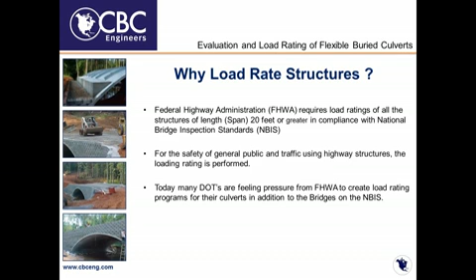Most of the structures that are load rated today in a conventional sense are conventional bridges. Those generally have spans of 20 feet or more, as mandated by FHWA. Here in Ohio we go down to 10-foot span as bridges. Today, more and more DOTs, states, and municipalities are being pressured and mandated by FHWA to look at smaller diameter structures and load rate those as well. That's what we'll be speaking about today.

Just some general information about loading on flexible buried structures. Generally, there are two categories: ring compression structures that develop their load carrying capability by carrying thrust tangent to the pipe wall, and flexural-based structures, such as aluminum box culverts, that depend on the moment capacity of the plate to carry the load. For ring compression structures, which we'll focus on today, it's a pretty simple calculation of the ring compression or thrust load in the pipe wall, based on the pressure at the crown of the structure and the span of the structure.

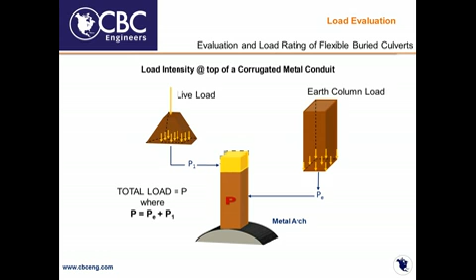That pressure at the crown of the structure generally is comprised of two components. One is your permanent earth loads or dead loads — this could also be pavement loads or concrete slab loads if you have a load relief slab of some kind over the arch. The second component is the temporary live load over the structure. This can be vehicles, tractor trailers, railroad, or even airplanes.

Flexible buried structures are inherently part of a soil structure interaction system, meaning their stability partially depends on the stiffness of the backfill material and the in situ embankment fill around the structure. If a structure is seen to have excessive shape change, a likely culprit is insufficient backfill support.

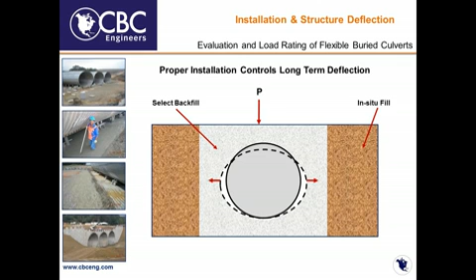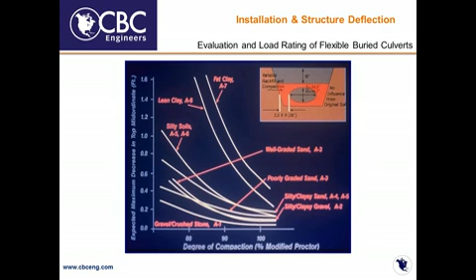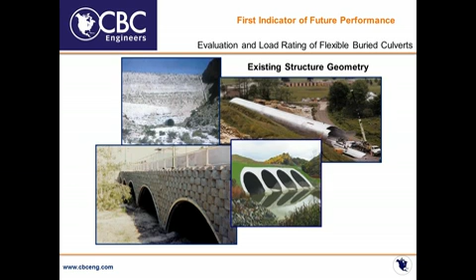As we spoke about relative to doing load ratings, you must know the existing structure geometry to be able to load rate a buried flexible structure. The Ohio DOT and other state agencies have developed relatively in-depth procedures for doing field evaluations of in situ flexible structures. Part of this is to determine the shape of the structure, as well as to assess its overall condition, which could contribute to varied capacities in the load rating calculations.

Flexible buried structures are designed to deflect, designed to change shape. As a flexible structure deflects under earth load, a soil arching is created that inherently increases the overall load carrying capacity of the entire system.

As we spoke about, if the backfill support is insufficient, there is the possibility of excessive shape change that could result in lowered capacity and/or higher loading on that structure. That needs to be considered in a load rating.

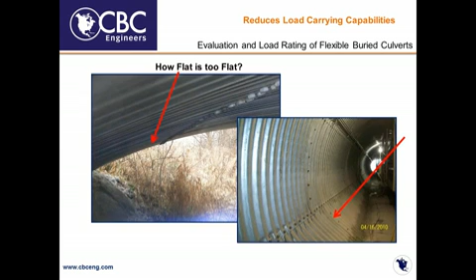Another possible cause of shape change in a structure is excessive live load with insufficient cover. A lot of times this happens during construction, where there is insufficient cover over a structure. A large piece of construction equipment is run over it, and you see a localized deflection where that concentrated loading was applied, signifying that the overall flexural capacity of that structure in its top arc has been exceeded.

The load rating of a flexible structure needs to be based on the critical shape geometry in any area that could be traversed by live loads.

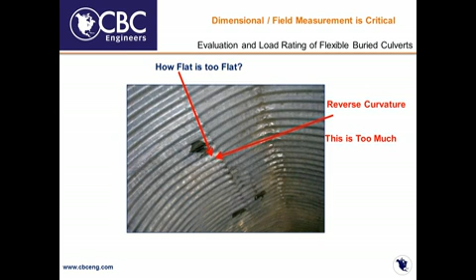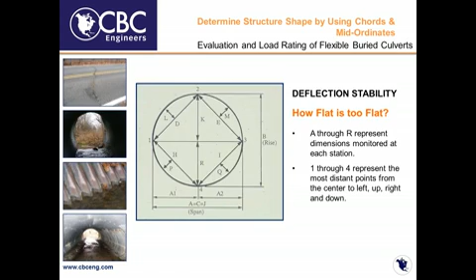Those measurements, where physically possible, can be manually measured using 4-foot levels, measuring rods, architect's rule, or engineer's rule. In a lot of cases, especially with larger diameter structures or difficult site conditions, you need to be a little more innovative about how to get those measurements.

We as a consultant try to be creative in that. We've developed and patented some rudimentary procedures to do that. This one on your screen is simple but effective. It consists of a handheld laser measuring device mounted to a tripod with a rotating wheel that can be rotated at an even degree increment radially.

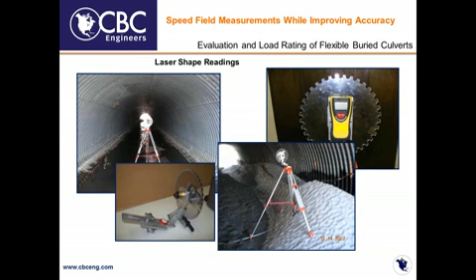At each degree increment, you're able to make a laser measurement out to the interior wall of a pipe, basically making the spokes of a wheel that measure out to the pipe wall around a full 360 degrees. Based on those measurements, that data can be plugged into CAD software, and you can get a relatively accurate, relatively exact representation of the interior geometry of a structure at whatever station you want to measure it at.

From there, that information can be used to physically measure those chords and mid-ordinates within the CAD software, or you can measure the radii of certain arcs. You can also, if the decision is made that some kind of remedial measures for a structure are needed, you've already got plots available that would show the size of a reline pipe that could fit, or if there's going to be stiffeners of some type added, you've got the geometry of the structure ready to use.

Another relatively simple but very effective piece of software is called MULTSPAN. It is essentially a geometry comparison model. It allows a direct input of measured chord and mid-ordinate values for a certain pipe at certain stations, and you're able to compare those measured values with theoretical values for that shape, or put in measurements from successive sets of measurements and determine a rate of deflection, or if there is any continued deflection in a structure over time.

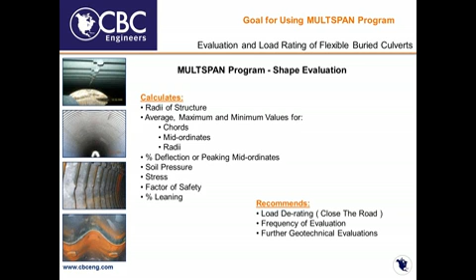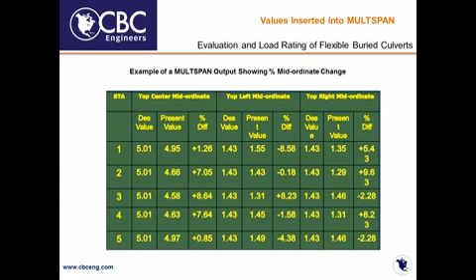This is an example table of some of the mid-ordinate output from MULTSPAN. Not a complex thing, but it's very effective to show you where you're seeing deflection and not. You'll see that it generally concentrates on the top center, top left, top right mid-ordinates. The top arc of a structure is generally its main load-carrying component, so that's what's focused on.

Here's the general guidance recommendations from MULTSPAN. As the level of mid-ordinate change or shortening occurs, along with the depth of cover you're looking at, the guidance recommendation becomes more severe. Once you reach that 25 to 30% mid-ordinate change, based on field evaluation of in-place structures, you've reached a level of deflection where the structure may no longer be acting like a ring compression structure. The radius may be so flat that it's starting to act like a flexure or beam type structure.

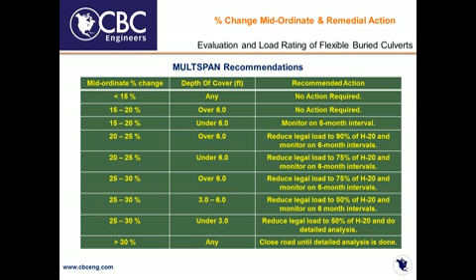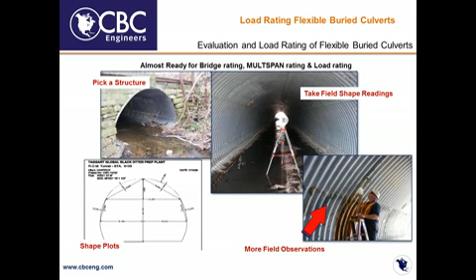So once you've made the measurements of the structure and got the plots done, a little more data is needed to actually do the load rating, some more field observations. Some of these specific to flexible buried structures are what you see here. Some will directly affect the load rating, such as features causing a loss in section, or deflections causing that top radius to increase, or features causing the load in the pipe wall to be increased. Others are monitored on a continuous basis to verify if any conditions are continuing to deteriorate, or if further, more in-depth evaluation than a simple visual inspection is necessary.

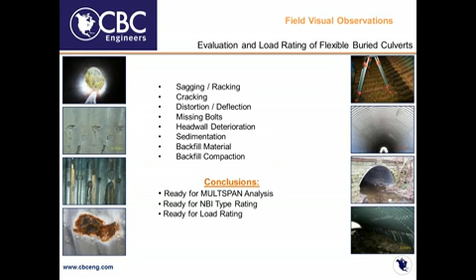Again, those are some of those same factors repeated, very specific to buried flexible structures. Once you've got this data along with the shape measurements, you're able to do the MULTSPAN analysis like we talked about. You're also able to do a conventional NBI type observation rating on a structure, as well as move on to the actual empirical load rating.

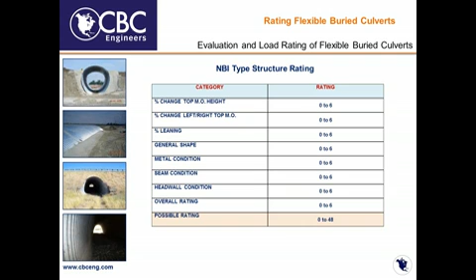Many of you may be familiar with the NBIS rating for conventional bridges. This is a system that was developed in conjunction with ODOT and FHWA by a former colleague of mine that is still used today for observation rating of flexible buried structures. It's got some categories specific to those types of structures, with 0 to 6 kind of rating categories.

This is a general comparison of that type of system with the conventional NBIS system. If you've got no category less than 3, or 3 or less, you're generally in that A, uniform deterioration type category. If you've got a single category with a score of 3 or less, you move over into the B type, more localized deterioration, which is similar to how the overall NBIS rating is determined.

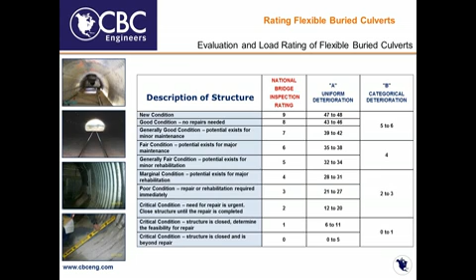So what is a load rating? We talked about how we've got a capacity of an element based on its in situ conditions, and we've got permanent dead loads on there that take away a percentage of that capacity, leaving some net capacity of that element, whatever the critical element is in a structure. We're using a numerical procedure to verify that net capacity is enough to safely carry the loading from a particular vehicle on that structure. This type of load rating is empirical and numerical, different than an inspection type rating, which has some subjectivity to it.

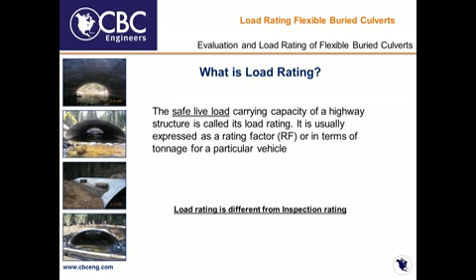What would cause you to do a load rating on an existing structure that may have been previously load rated? This list is similar for conventional bridges. Anything that has changed the physical conditions, such as alterations - was there some type of slab placed over the structure? Was the height of cover changed? Was there some type of deflection? Was the structure impacted, being an underpass type structure maybe, and it changed the geometry? Was there some type of stiffener or new component added to the structure? These are similar things you find in observations as to whether there was a physical change in the structure that would make the existing load rating no longer applicable.

There are generally 3 types of load rating methods. 2 of these are about the only ones used anymore. We've got working stress or WSR kind of rating - that's probably the most conservative, and it's not generally used much anymore. LFR and LRFR are the more common ones today. LFR used to be the more common one, but it seems the shift is being made to LRFR in response to the way all design is moving to LRFD.

When we talk about buried flexible structures, these product lines have been around for a long time in some instances. You've got general CMP, which is well over 100 years old, and steel structural plate, which is going on 80, 90 years. The others, the aluminum type structures, are not as old, but they have been around before LRFD was ever even a thought. So it has to be discussed, and each state generally has protocols for, depending on when a structure was designed and what code it was designed under, as to which rating method should be used.

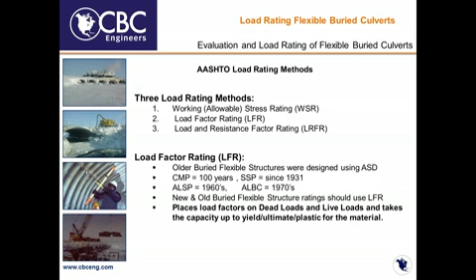In a load rating, there are 2 different rating levels: an inventory rating, which is done for routine, repetitive type vehicles, your design type vehicles. Under LFR, you'd be an HS20 type vehicle. Under LRFR, you'd be an HL93 with a truck or a tandem and your lane loading. Operating stress is more of your non-routine, non-repetitive vehicles, generally like your legal loads, AASHTO legal loads, or your posting loads. These are loads or vehicles that if they were on a routine basis, would likely result in a reduced service life for that structure.

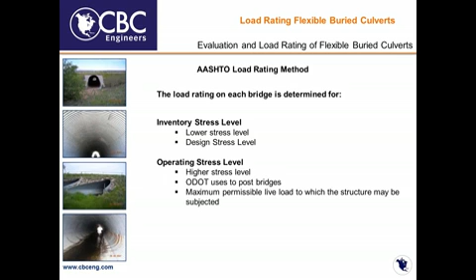Some of these slides you'll see in a minute come from an ODOT previous presentation - these are the Ohio vehicles. Being an Ohio firm, we deal with Ohio load ratings a lot. These are generally the ones used for an LFR rating, the ones generally looked at. You've got your normal design vehicle there under both inventory and operating, as well as your more legal AASHTO legal type loads in the 2F1 through 5C1 vehicles.

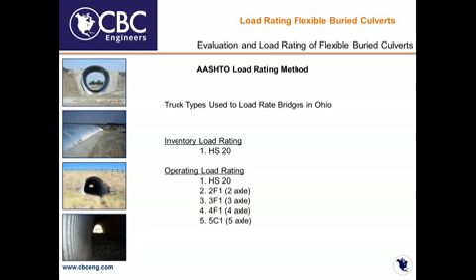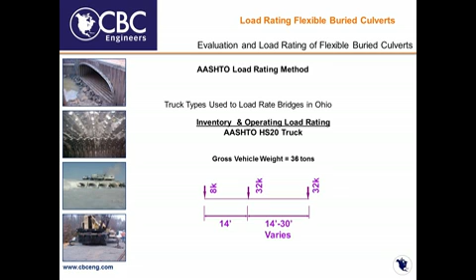Coming up are the diagrams, the loading and axle diagrams for those ODOT specific vehicles. A load rating is done for a specific vehicle - it is not some general rating that covers every single vehicle that could ever go over it. It is a rating specific for the vehicle being investigated. For that reason, it's critically vital for the axle configuration, the tire pattern, and the axle loading to be known for that vehicle. The calculations will be done, with the pressures on the structure from that vehicle calculated based on those specific vehicle configurations.

There's HS20 and the 2F1 - these kind of get more severe as you go further through. Like in a 5C1 vehicle, you've got axles at 4 feet on center. Depending on height of cover, you will likely have superposition of axle loading on a structure from 2 different axles that will greatly increase the pressure on the crown of that structure for that type of vehicle.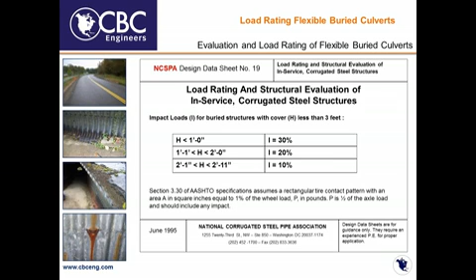Here's the specific operating load rating equation based on wall strength. You've got your capacity of the pipe wall T-cap there, which is again either based on wall strength, wall buckling, or seam strength. You've got your earth load there, which is factored by a factor of 1.95. You can see in those two equations that for a structure that has seen shape change, the measured top radius - the maximum measured top radius in the structure - is substituted, with twice that top radius substituted for the span in the load rating calculations.

You can see as a structure undergoes shape change, that directly influences the calculated dead load applied to the structure, as well as in the live load calculation, where that span - or twice the top radius - is included with the live load plus impact. So deflection or shape change of a structure directly influences its load rating.

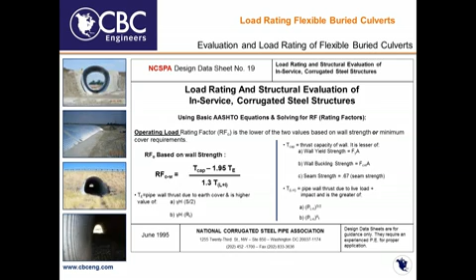There's also a minimum height of cover component to the load rating, and the actual reported load rating is the minimum of either the wall strength based rating or the minimum cover based rating. There are AASHTO defined minimum required covers for structures based on their span and different components. Then you have your actual height of cover in the numerator. That C factor is a reduction in the required factor of safety based on this being for operating load for non-routine vehicles.

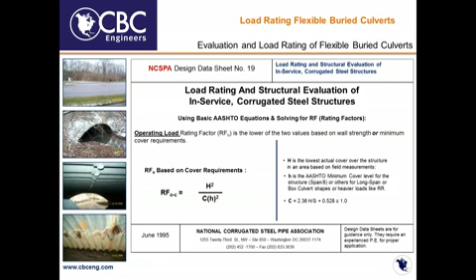The inventory load rating factor, like I said, is generally computed as 60% of the wall area or wall strength based operating factor, or it's again based on minimum cover without the reduction C factor in factor of safety, based on this being for inventory or routine vehicle loads.

Once the rating factors are computed, depending on where you're analyzing and for whom, some states just have you report the rating factors themselves. Other states require that the ratings be documented as a tonnage of a vehicle, based on the gross vehicle weight and the computed rating factor. Each state is pretty unique in what vehicles they want load rated, as well as how they want those ratings documented and what kind of form and format they want them presented in.

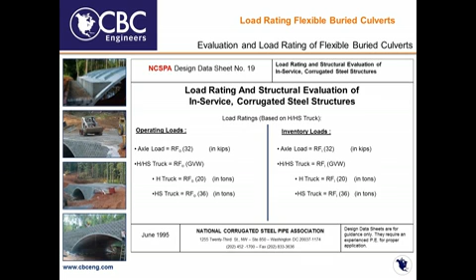In conclusion, some things to remember. We talked about the age of some of these corrugation profiles, going back almost 100 years. Steel structural plate, which is a 6x2 corrugation today, was not always 6x2 - it varied in corrugation pitch and depth. So if you're looking at older structures, you need to be sure you know the correct section properties. A critical part is the top radius - it has to be measured and physically known, and twice that maximum radius is used as the effective span of that structure in the load rating.

We talked about the desire for flexible structures to change shape to increase their load carrying capability. We also talked about insufficient backfill support allowing excessive deflection to occur. This is all the more reason why monitoring, as in any prudent structure, would need to be done - these are no different, they need to be monitored. We also talked about how deflection or flattening of a curve, if it becomes 25 to 30% or more, you've basically reached a point where that curvature is likely no longer acting like an arc and may be acting like a flexural piece.

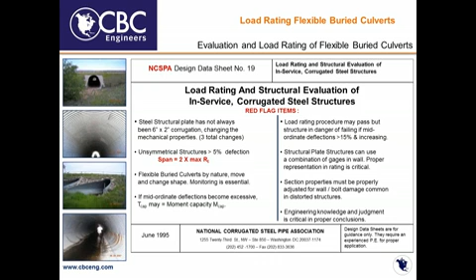The others are pretty self-explanatory things we've talked about. I appreciate your time here today, and I'll pass it on.

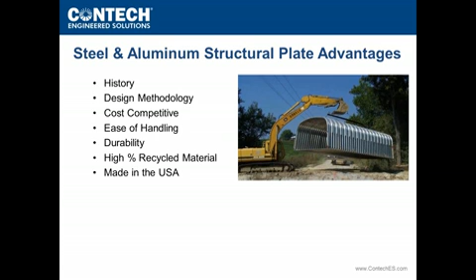Why design with aluminum and steel structural plate? There are many advantages. One of the main advantages is the cost savings over traditional concrete small span bridges and large concrete culverts. Another large advantage is the speed of construction, including the speed of material delivery after an order placement, and the speed of assembly and installation, which all help in reducing road closure time. In addition, aluminum and steel have a very high recycled content.

There are many different shapes you can choose from - each shape may have a design advantage for your project. As an example, a round steel multiplate, 12 foot in diameter, can handle over 100 feet of fill. Box shapes and arch shapes on footings have hydraulic advantages, as you can see in the 2 photos on this slide.

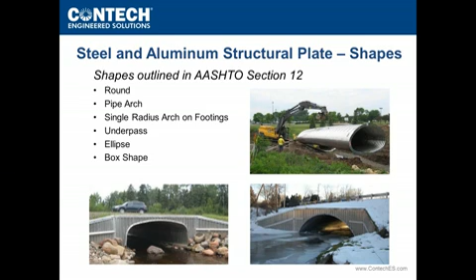Structural plate products are designed to meet current AASHTO LRFD loading and other loading conditions, including railroad, special crane loading, and military loading applications. Contech is ready to assist you with any structural design needs you may have.

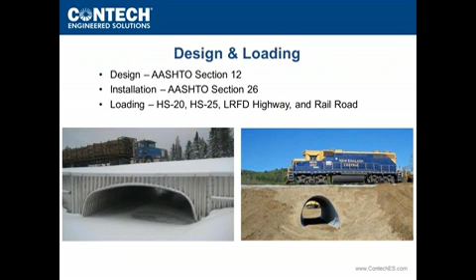Today we use a lot of aluminum structural plate. Here's a modern-day aluminum structural plate installed on footings after 5 years of service. You can see the hydraulic advantage for this 3-side arch culvert. In addition, aluminum head walls and wing walls provide economy versus cast-in-place concrete.

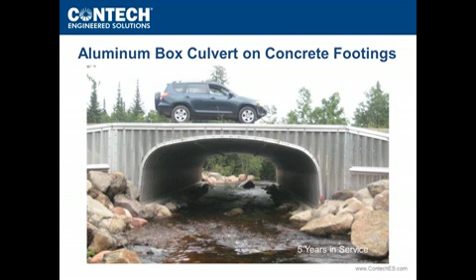Some of those items include backfilling with a clean, granular, well-drained material, and installing a PVC membrane over the top of the structure to keep salts off the crown. This is a good practice not only for steel plate design, but also for concrete design. Other ways to increase durability are to design with an open bottom culvert.

This older project shows the durability of aluminum structural plate pipe arch. After 46 years in service, this aluminum plate has no corrosion. You can see the photo to the right. That's the invert. There's no corrosion on that aluminum.

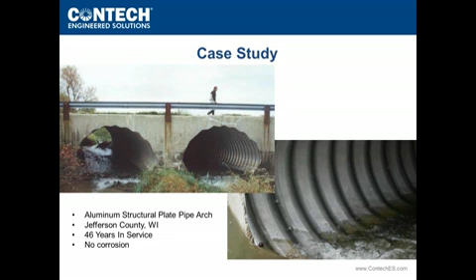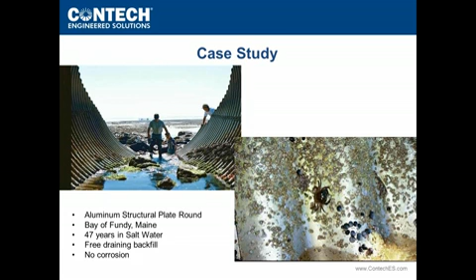This next photo is of a round aluminum structural plate in the Bay of Fundy in Maine. The aluminum plate is made of 5052 marine-grade alloy. After 47 years in a saltwater environment, the plate is in excellent condition. Note the backfill was a clean granular material, allowing the aluminum to breathe and form a protective aluminum oxide barrier.

Aluminum allows for a wider, more corrosive environment range than steel multiplate. Aluminum has been traditionally used in corrosive environments such as sea and brackish waters, as well as acidic environments such as cranberry bogs.

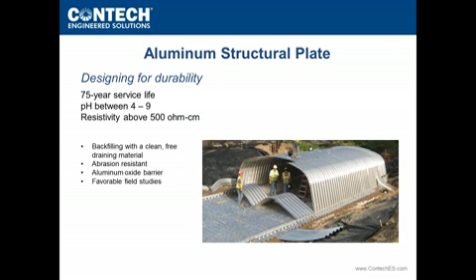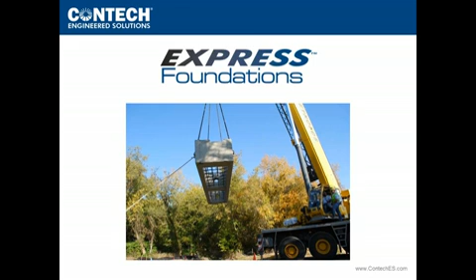The next few slides will focus on 3 different hydraulic applications with over a 20-foot span, using both steel and aluminum structural plate.

An express foundation is a precast foundation system that blends the speed of precast concrete with the economy of cast-in-place. Express foundations can be used on both steel and aluminum plate, as well as 3-side CON/SPAN concrete arch structures. The express foundations are pre-designed with rebar placed at the plant prior to shipping. The purpose of the express foundation is to speed the construction process.

Just as they say at the Wisconsin DOT, every day counts. Express foundations are picked off the flatbed truck and placed on a level foundation. You can see riprap is placed on the inside of the footings before the structure is installed. There is no need to construct concrete forms, which can save several days in the construction process.

The lightweight aluminum plate structure is lifted into place with 1 pick and 1 drop. This particular structure is a 22-foot, 9-inch span structure. These are quick and easy to install. The plate structure fits easily into the express foundation.

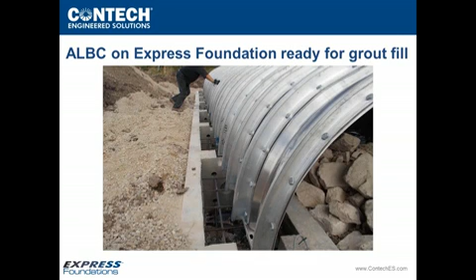The next step is to fill the void of the express foundation with concrete. You do not need to have experienced concrete laborers to do this job. This particular job was done by a county workforce.

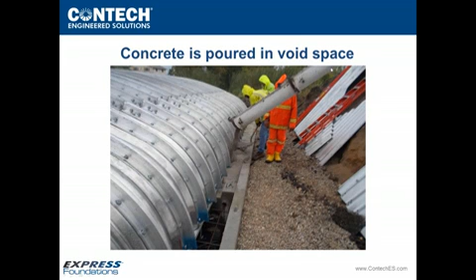The next slide shows the finished buried bridge with aluminum head walls and wing walls. This head wall system is a tieback system that requires no concrete, which saves time. The entire project took approximately 7 working days from start to finish, and approximately 3 weeks of construction time was saved going from cast-in-place footings and cast-in-place head walls to the express foundations and aluminum head walls and wing walls.

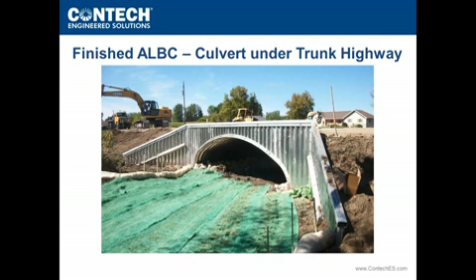This is the same project 1 year later. Notice there is no bridge deck to maintain. It's a smooth surface throughout the road and over the culvert structure.

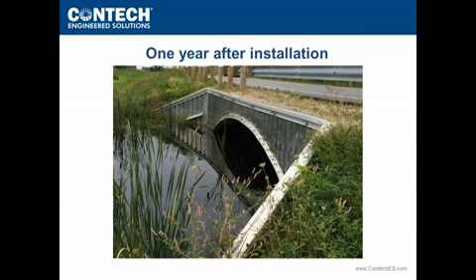This is a 33-foot span aluminum box culvert shape. This structure was assembled in the parking lot adjacent to the project site. The entire 33-foot span structure was lifted and set into place in one piece.

The express foundation was lifted off the truck and installed on level ground. Concrete was then poured into the void space, as seen in the photo on the right.

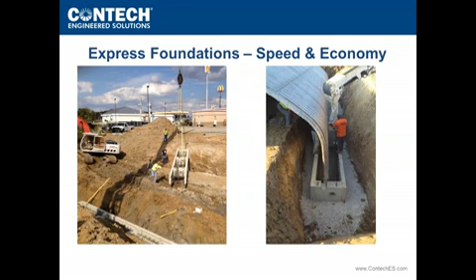These photos show the before and after of pouring concrete into the express foundation. The contractor on this project was a utility contractor who does not specialize in forming and pouring concrete. The express foundations gave him more confidence to build the job.

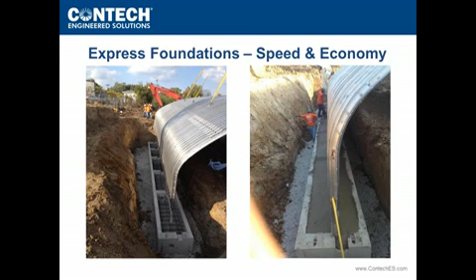This is the finished photo of the buried bridge, complete with aluminum head walls and aluminum wing walls. Once again, there is no bridge deck to maintain.

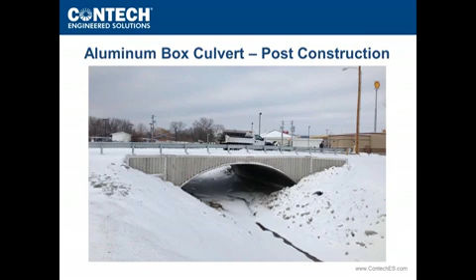This is an Iowa Department of Transportation project showing the before and after photos of a 50-foot span concrete beam bridge that needed to be replaced.

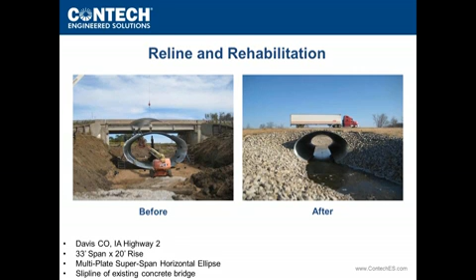The Department of Transportation considered 3 different options for bridge replacement. 2 of those options were conventional bridges, and the third was a 33-foot span horizontal ellipse steel Multi-Plate.

These photos show construction of the new steel Multi-Plate during the entire construction process. There was no road closure time during this entire construction.

There are many Amish people driving horse and buggy in this part of the county. There would have been several miles of detour if a traditional bridge construction was chosen.

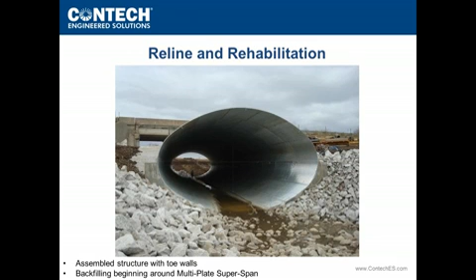The bridge deck was left in place. Holes were core drilled from the top of the bridge deck in between the I-beams, then filled with a flowable fill material. Leaving the bridge deck in place saved both time and money for the owner.

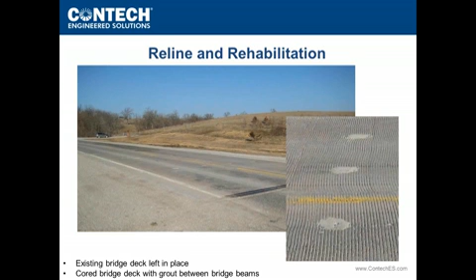By eliminating a conventional concrete beam bridge and replacing it with a 33-foot span steel multiplate, the owner was able to eliminate the bridge deck. No bridge deck means no bridge deck maintenance, no bump on, bump off the bridge, no freezing of the bridge deck, a much wider shoulder to drive on, and ultimately a safer road to drive on.

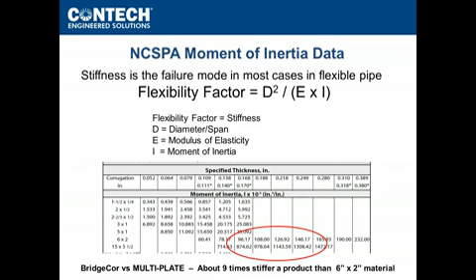Since the 1970s, Armco and Contech have been promoting Multi-Plate Super-Span with the conventional 6 by 2 corrugation for larger spans, those spans typically over 26 feet. So over the years, we've manufactured thousands of structures in that 40 to 50 foot range maximum span.

Each one of these structures requires a select backfill, an A1A, a very defined backfill material to allow you to get the type of support you need for this type of flexible structure. They require an on-site monitor person during the backfill process all the way through to minimum cover. And they require an installation of a reinforced concrete thrust beam at the 10 and 2 o'clock position to be able to lock in that top arch.

With the added stiffness provided by the deeper corrugation BridgeCor, we have some changes in how we're assembling these types of structures. They allow for a wider range of locally available backfill materials, a key point in the installation. Depending on the size, they potentially require less structural monitoring during the installation process. They eliminate the need for the thrust beam in the structure design, which helps speed up the overall culvert installation. And in many cases, we can reduce the gauge for a given span to help with the overall bridge economy. Trying to optimize that shape, gauge, and span can really help us with bridge growth.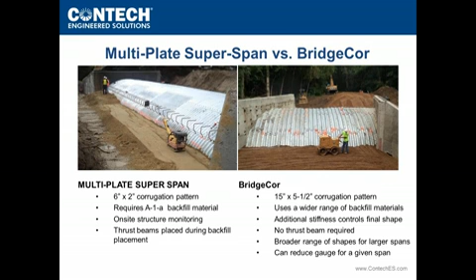We offer a variety of shapes and sizes with our BridgeCor product line. When larger spans are required, the deeper corrugation BridgeCor gives designers a lot more options in shape selection. When possible, round structures are always the first choice, since they eliminate the cost and time of footing construction.

Round structures are the easiest to assemble and the most stable during the backfill process. When working in environmentally sensitive areas, the single radius and 2-radius arches can clear span restricted stream crossings, which is an important point in permitting today. This helps speed up the permitting process and eliminates key durability issues in our design. The BridgeCor box culverts can provide large spans in applications where you have limited elevation change between the invert and the top of the grade.

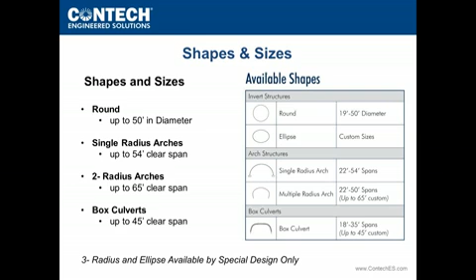When designing with deep corrugated structures, AASHTO Section 12 of the Design Code gives very specific guidelines on how to evaluate these designs. AASHTO Section 12.8.9.3.2 states that the designer must use an accepted finite element analysis program to design these structures.

In addition, the specification states we need to understand the bridge location, the environment of that location, and the in-situ soils. We need to consider the strength and stiffness of the corrugated steel material being utilized for this bridge. We can help with this process.

With a proper geotech report based on the specific bridge location, we can start the finite element analysis for you. Information from the geotech report will help choose the structure shape, the structure's gauge, and if required, the potential footing size of this particular bridge. Once we have this information, we can provide a material estimate for your budget.

In addition, the AASHTO specification also requires the manufacturer to help facilitate an on-site pre-construction meeting to review the BridgeCor installation process, an important part of the overall bridge installation. At this time, we can also outline the proper method for monitoring the structure during backfill placement so that the manufacturer, the contractor, the engineer, and the owner are all on the exact same page.

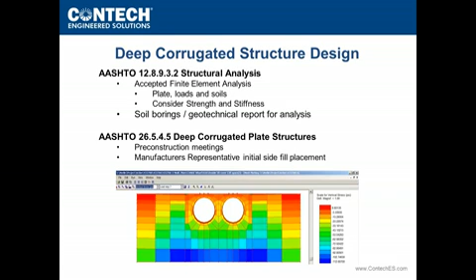So no matter if you're considering a multi-plate, an aluminum structural plate, a super span, or a BridgeCor for your project, we have some tools that can be helpful along the way. To help you begin the structure selection process, we have compiled a structural plate design guide booklet. This design guide helps with shape, sizes, and gauges for all of our plate structures, and gives key help with proper specifications for your project.

You can download this booklet from our website at www.conteches.com, or for a hard copy, contact a Contech sales or bridge consultant near you. It's an awfully good book you should have in your library.

Aluminum box culverts are used for bridge structures in all of our markets for a variety of different applications. If you're considering an aluminum box culvert for your project, log on to our website and use our Design Your Own Bridge link for help. This link utilizes the aluminum box culvert Design Your Own Bridge tool to help you develop an initial proposal drawing and receive a material estimate for your specific bridge location. This tool gives you a real good look at what your bridge will look like from the initial design.

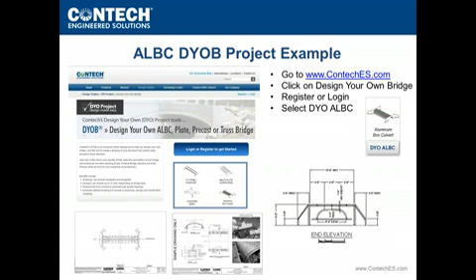So as I wind down the presentation for today, I want to take you through a few case histories of some successful BridgeCor installations we've had so far.

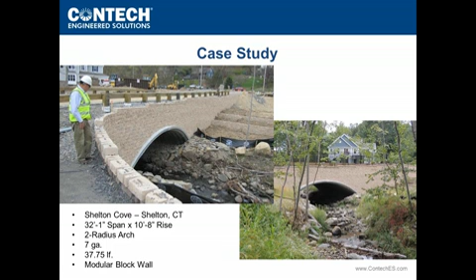This 32-foot span, 2-radius arch BridgeCor was used in a housing development in Connecticut. This open-bottom BridgeCor structure provided the clearance required in an environmentally sensitive stream. The large span kept the normal water flow away from the structure and protected the overall stream during construction. In addition, the developer selected a modular block headwall to improve the overall bridge aesthetics. Nice looking bridge.

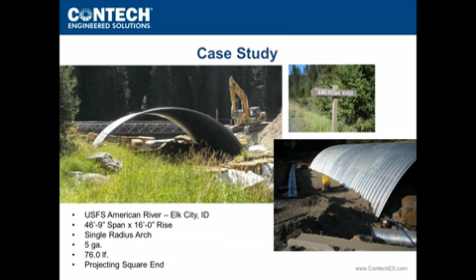In another environmental application, this BridgeCor was used as a stream crossing in Elk City, Idaho, up in the middle of nowhere. The 46-foot 9-span BridgeCor single radius arch opened up 60,000 acres of watershed to help with future fish migration. In addition, the BridgeCor provided an economical solution for the United States Forest Service on this important Indian reservation. The project engineer utilized projecting ends as a selected end treatment for this particular structure.

BridgeCor has been the product of choice in many mining applications across the country. In this application, BridgeCor is used as fall protection for vehicles at a high wall location, deflecting debris away from traffic and people for mine safety. This application called for the stiffer, deep corrugated BridgeCor structural plate.

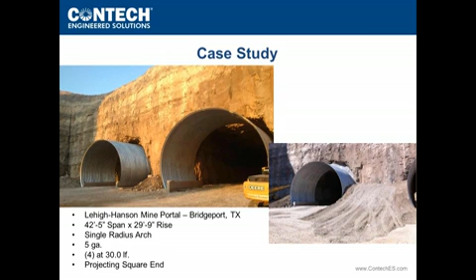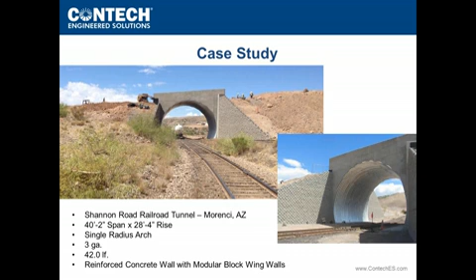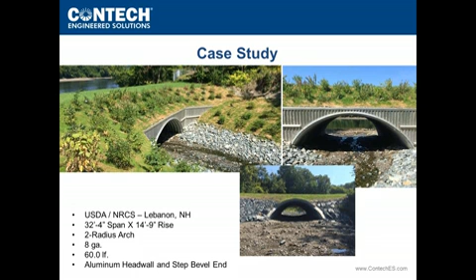Thank you very much, Brian. We do have a few more minutes, so we could get maybe two questions in. Brian, this one came in as you were talking: can you use an express foundation on a bridge core? Yes, Lisa, you can use an express foundation for any of our Contech bridge products, bridge core, structural plate, the Multispan O series, along with even abutments for our truss bridges. Good question, thank you.

And Mitch, can you help me out here? I got one during your presentation: can you help us set up a load rating program for our county? Yes, most definitely. In past instances similar to that, we've helped out at a variety of levels of involvement. Sometimes we've done all the field work and work necessary for the load rating. Other times we've been asked to teach or instruct local workforce on how to do the field work, and we handle the office engineering. In other instances we've helped train in-house engineers on how to do the load rating process. We'd be more than happy to help anybody that needs it in any way we can.